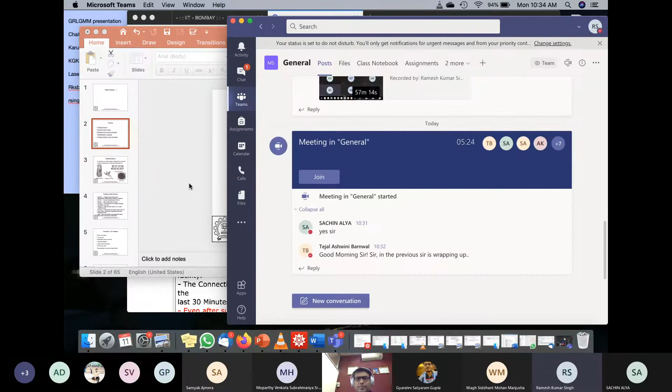So today what we will do is we'll cover about basics of casting. Hopefully I'm clearly audible, right?

Yes sir, good. And the students, are they still in the other class, or coming back? The number of students is around 15 right now. That's fine, I think we'll start now.

So basically, this class, what we'll do is cover casting basics. Then we'll talk about patterns and molds, and then there is some analysis. We'll talk about melting and pouring analysis, and then solidification, because casting inherently is a process where you pour molten material and let it solidify. And then there will be some defects and remedies which we'll talk about. So that's the outline for this entire casting topic.

So if you remember, we showed you some casting examples in the first slide, in the first class, where things were being cast. One was the wheel, which was cast, and the engine - if you remember, the cylinder was cast, the engine cylinder was cast. So the biggest casting in automobile is still the cylinder block, and of course the wheels were cast.

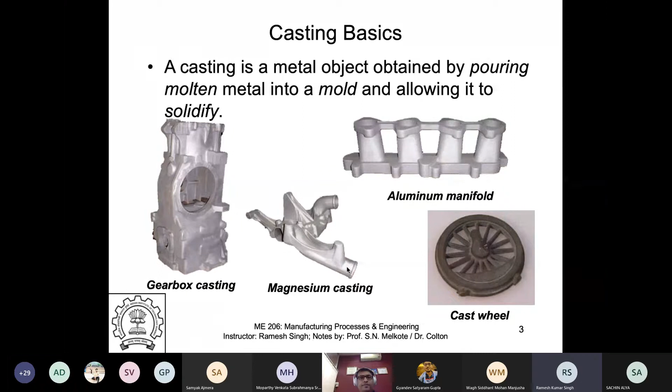Okay, so before we go into main details, we will show you one animation explaining the basics of casting. Let me just give me a minute, I'll start it.

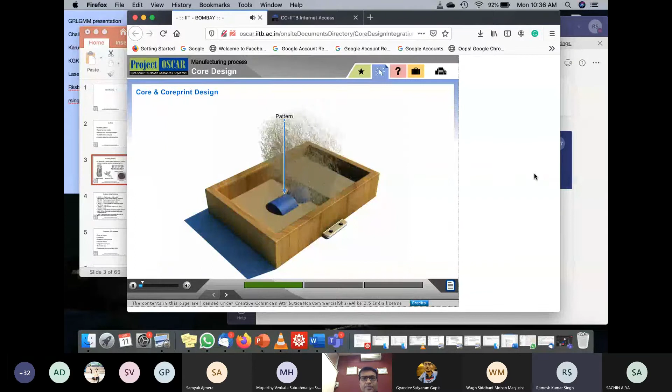Is it audible? This demonstration provides useful understanding of the following steps. Take hollow boxes, rectangular in shape, called cope and drag. Place the wooden pattern as shown in the animation. Fill with sand in layers and ram for equal distribution of sand and compactness.

This is a pattern, and there is cope and drag - two boxes, and the pattern is split into two. So this is the other half of the pattern, because you have to take the pattern out. That's why you split it into two parts, so that you can take it out.

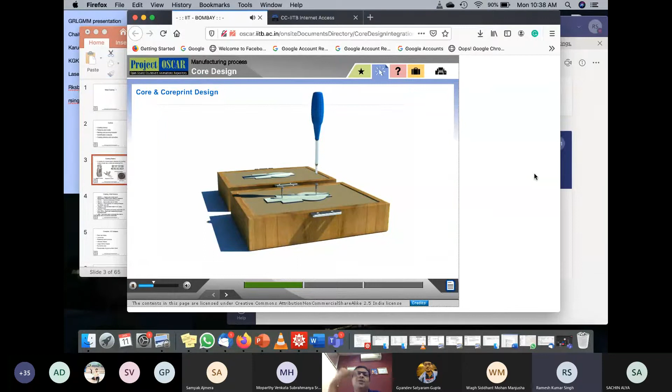Invert the boxes and remove the pattern, so you can take the pattern out now. You will have two symmetric hollow things. You put it back and then pour the metal to get the full shape. So you are splitting it because you have to take it out and create a cavity of the solid part which you want.

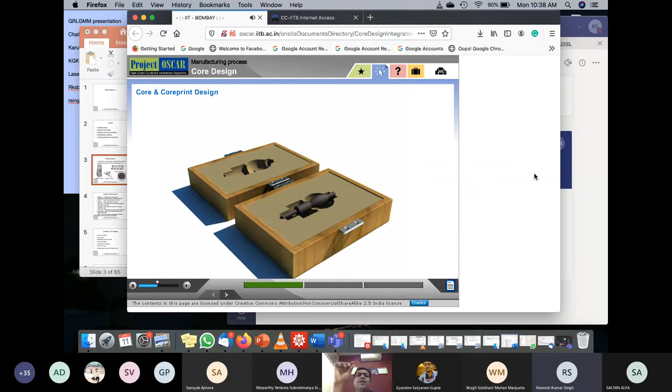So you got it out, so you got a hollow cavity on both sides. And if you want it, it is supported by core print - the core basically is this portion you want hollow. So you have a solid thing, and you can create the hollow shape by using a core. Pour the metal and the fluid fills as shown in the animation. So basically, wherever the core is, you will get hollow geometry shapes.

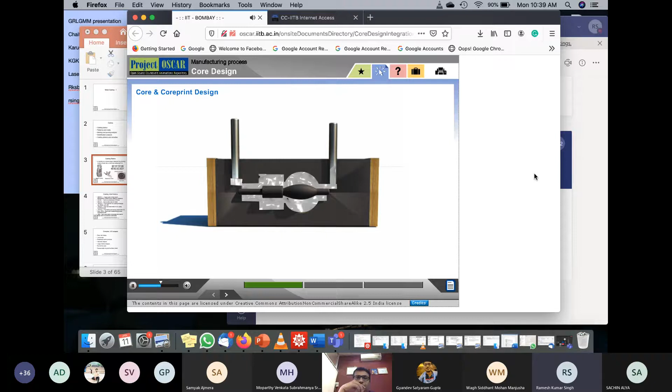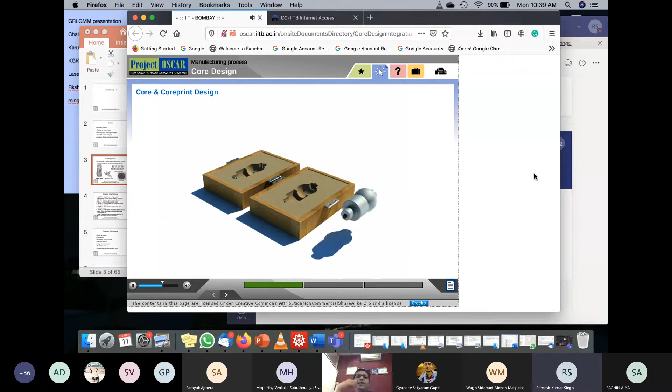Now you have a product with a hollow shape of the core inside. You can break the core and get a product - this core can be broken, inside is a hollow shape. So this core can be broken and you can get this hollow part. A sand casting pattern is similar in shape to the cast product.

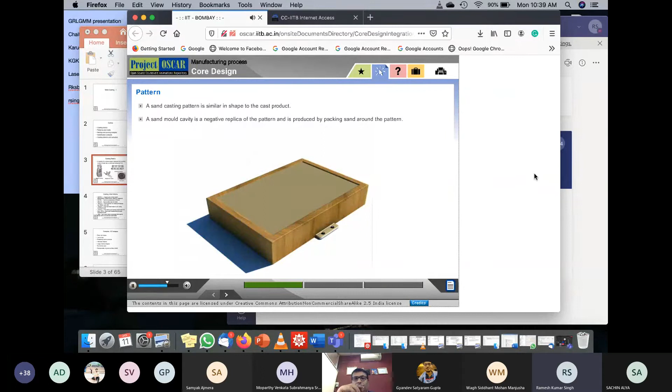A sand mold cavity is a negative replica of the pattern and is produced by packing sand around the pattern. Core: a core consists of two portions, the body of the core and one or more extensions called prints. The prints are necessary to support the core in the mold. They also conduct the heat and gases produced by a sand core to the mold.

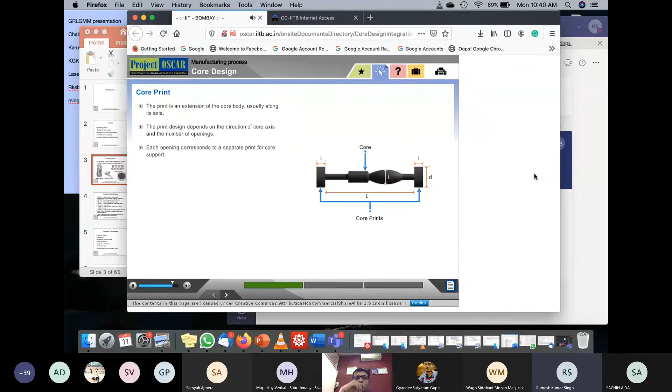Core print: the print is an extension of the core body, usually along its axis. The print design depends on the direction of the core axis and the number of openings. Each opening corresponds to a separate print for core support.

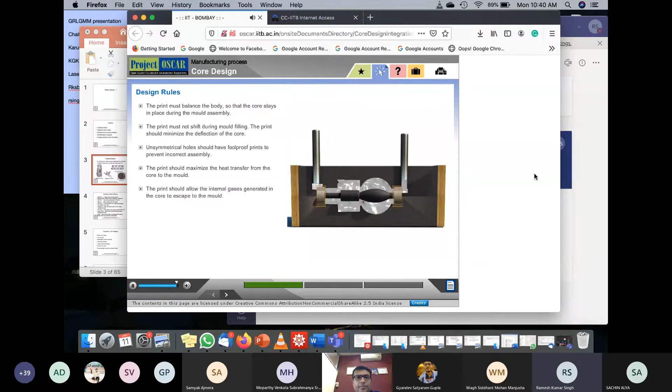So print is just going to support it, right? The print must balance the body so that the core stays in place during mold assembly. The print must not shift during mold filling. The print should minimize the deflection of the core. Unsymmetrical holes should have foolproof prints to prevent incorrect assembly. The print should maximize the heat transfer from the core to the mold. The print should allow internal gases generated in the core to escape to the mold. The prints of adjacent cores may be combined into one.

Okay, so I'll just stop here.

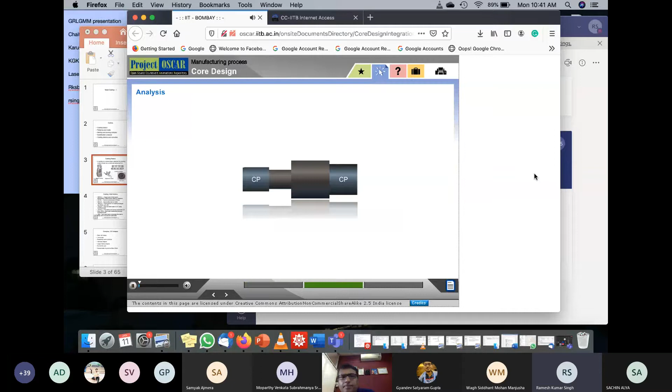So now you have a fair bit of idea about this. Are there any questions? Let me check the comment box.

How was the core removed finally? A core, you can break it. Since you have access to the core because the print will be there from the top, you can go ahead and use a chisel or hammer to break it. So the core can be broken. You can take some sort of chisel and break the core out of it. The core always has access because it's a hollow thing, right.

The problem would be if it's a closed hollow thing, then it may be difficult. In that case, you'll have to do something else. But typically what happens is you need to have access to the core. Otherwise, if it's hollow inside, there may be difficulty breaking the core. But you typically have access to the cores.

So cores can be broken. But if in some cases you have a totally closed kind of thing, you'll have to make the casting such that... there are other methods in that case. I'll show other ways to do it.

You can have the mold itself designed such that the hollow portion will not remain in the mold. So you'll have to figure something out with that. There are other ways, and I'll show you some other methods to do that.

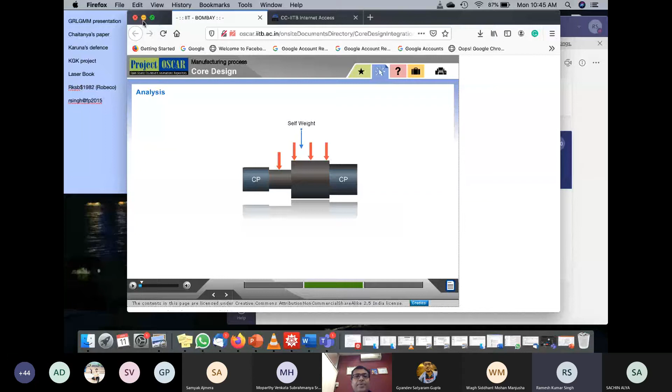But typically you want sand where you can have enough strength, so you need sand, you need binder, and you need good quality sand to do casting. I'll talk about what kind of sand you need. So let me just go ahead.

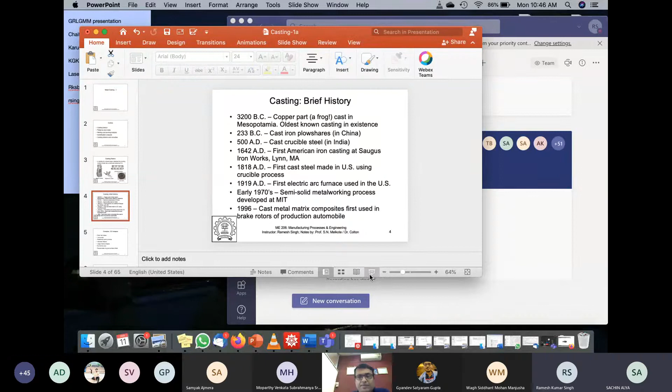Plowshare is basically a hull, the thing known for tilling the land. Chinese made a cast iron plowshare way back in 233 BC, and Indians could make it around the time of Aristotle. Greeks imported swords from India because Indians could actually make wrought iron. They knew how to forge and cast.

Cast crucible steel in India was done in 500 AD. In the US, the first cast steel by crucible was done in 1818, so India did it 1300 years before. We have the Mehrauli pillar, made of steel which has not corroded in 1500 years, probably from the Gupta period. There's no corrosion in the iron they created, still a wonder for metallurgists.

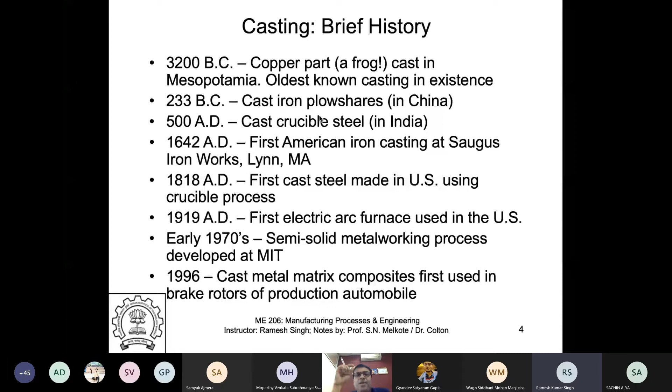The first iron casting was at Lynn, right next to Boston, in 1642 AD. Initially electric furnaces were not there; these were all coal-fired furnaces before. In 1919 the first arc furnace came into the US, and in the 70s they developed semi-solid metal working process, which is basically a combination of casting and forming. Then in 1996, metal matrix composites were cast, basically casting metals with ceramic particles in them.

The advantages of casting are that you can create near net shapes, do low scrap casting, and it's a relatively quick process. Casting can be done very fast. It can be used to create intricate shapes, and you can also create large hollow shapes. There's no limit to size, so casting is as big as you want.

You can create castings and get reasonably good surface finish. For dimensions, at least sand casting you can do as large as you like, and you can do small, like 1 millimeter or so. All the gold ornaments are cast, so you can imagine the length scales in casting, any size you can imagine can be cast. Most of the big products, the huge machines, their structures are all cast.

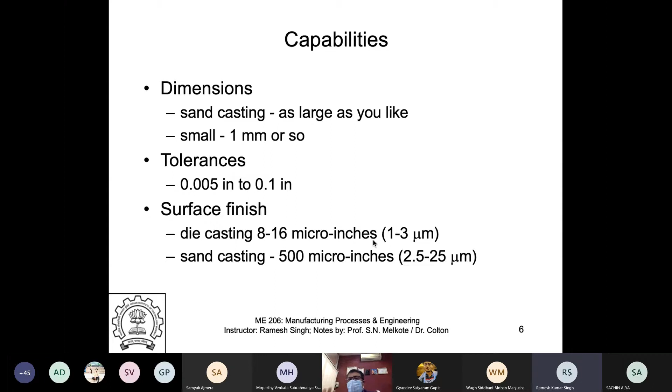The tolerances can be from 0.005 inches to 0.1 inches, and the surface finish depends in die casting. Die casting is when you have a permanent mold, so you can take a steel mold and inject aluminum or brass into it. Most plumbing products, your faucets and taps, are all die cast, especially if it's brass or aluminum. Steel die casting needs something of very high melting temperature, so it's still a bit difficult, but aluminum and brass you can do very good quality die casting.

These are some of the processes: sand casting, shell casting, plaster casting. Let me show you videos of these processes. One student mentioned he doesn't understand sand casting, so I asked him to unmute and tell me what exactly he doesn't understand, so I could explain it properly.

The student said he doesn't know the terms, asking what sand casting is. I mentioned I showed a video earlier with two boxes, but let me explain step by step what sand casting is, since if one person didn't understand, maybe others didn't either. Just give me a minute and we'll go back to it.

Sand casting: if you want to create a product, first you need a pattern. How many people don't know what a pattern means? Whatever shape you want to create, you need to cut it into half. Imagine I have to cast a ball. I will take two hemispheres, because I have to take this ball out. If I have to make a solid ball, what kind of cavity do I need? Tell me.

What kind of cavity do I need? A spherical cavity, right? Full spherical cavity, right? Yes or no? Yes, sir. So now I will take two hemispheres.

Imagine this is a hemisphere, and then I will take a box, and I'll basically put sand on this box. Then I'll ram the sand with the ball. So imagine this is not a this thing, but a half ball.

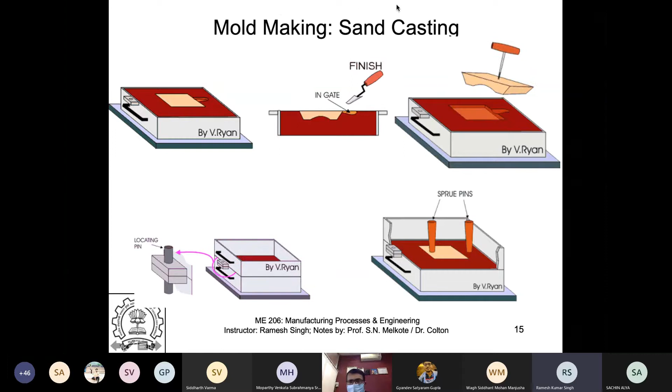And then what I will do, so this one is very simple geometry, right? This geometry is only, I'm making a, what is it called? Just a rectangular kind of a thing. So I can just take the mold out like this and then put more sand into it and cast this kind of a part. And then out comes this kind of a part.

But if you imagine I have a more complex part, say I have a ball. So what I will do is I will put in this box, let me just show you something like this with the pointer option. I'll use half ball here, half ball here, and extract it. Let me go back to that video again.

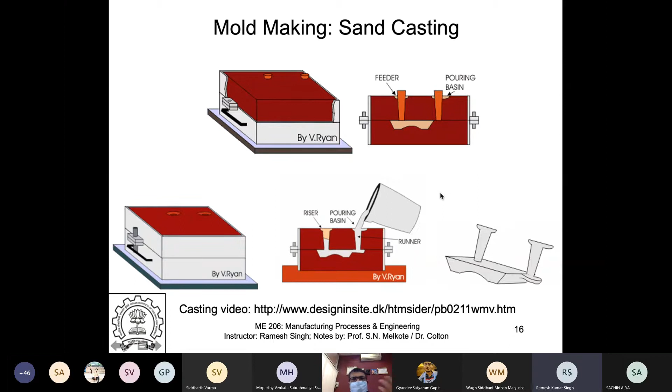So sand casting is only sand because you're using sand there. Let me just go back and then show you this thing, how to extract the, if you don't remember that.

To make a hollow metal casting, we require a pattern supported by a core and a core print. This demonstration provides a useful way of understanding the following steps. Take a hollow box, rectangular in shape. One is called cope, one is called drag.

The two boxes, as shown, so this is the half pattern. So you'll put a ball there, half the ball there, and pack the sand for compactness. And this sand will not be natural sand. This will be with the binder, so that when you pack it, this sand will become almost like a solid, right? And then you basically put the other one.

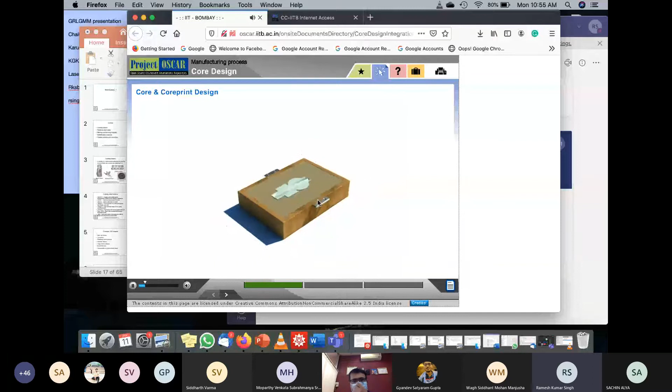Put the other box on top of it. The bottom one is drag, the top one is cope. And then you put the other half pattern on top of it. And then put the sand, ram it.

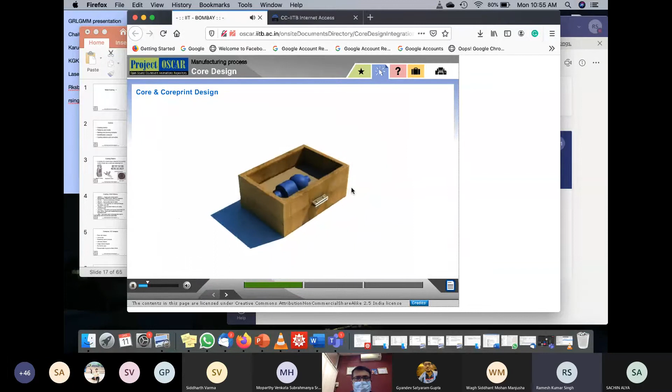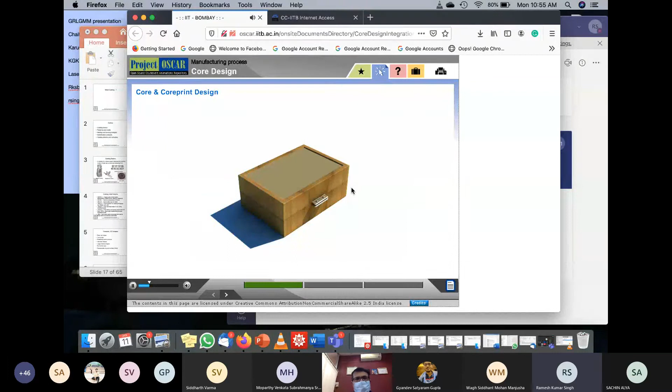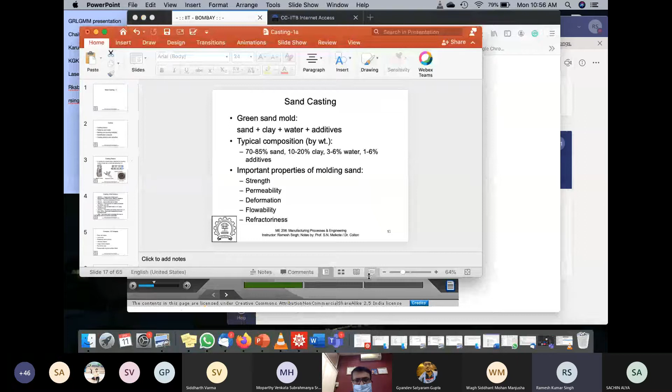And this cavity is surrounded by sand. That's what sand casting is, because you are creating this cavity in two boxes full of sand. And those boxes are termed cope and drag. I'll stop this here now and go back to this. So now you get what sand casting is, right? Anybody who has not gotten sand casting? Okay, good. Very good question.

How is the pattern made? So pattern can be made by machining, by somebody who is very skilled can carve it out of wood. Right now it is done by 3D printing. You can take a solid model, do a rapid prototyping, 3D printing of it. You can also do machining of it.

Or if somebody is very creative, because back in the day, somebody had to make the pattern, right? So somebody would make the pattern in wood. That's what they would do. You get me?

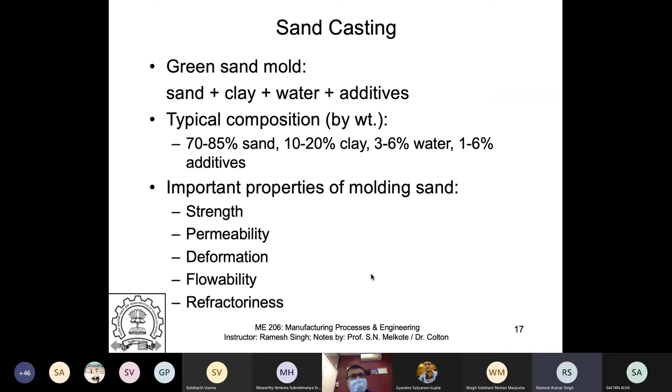Yes, sir. So there are multiple ways to make the pattern. A, you can do 3D printing. B, you can do machining. C, you can do woodworking. D, somebody can give the shape by shaping the wood, right? Like if he is very talented, because back in the day, the entire shape pattern was created by hand. People, the shilpis, had the skill to do it. Today, probably not, right? So that is what sand casting is.

So sand casting requires, let me just go ahead to sand casting. I've shown you, right? Now you know, everybody knows what sand casting is. So there are multiple ways to do casting. Sand is just one of them. You can do shell casting. So let me just wait and show you some videos of shell casting.

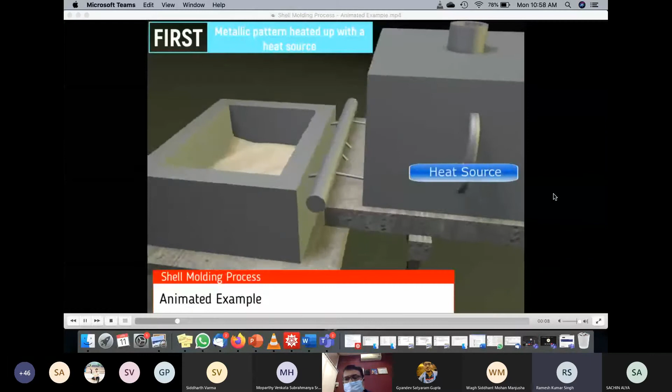Shell casting is also a very interesting process. I'll show the shell molding process. So they take a metallic pattern.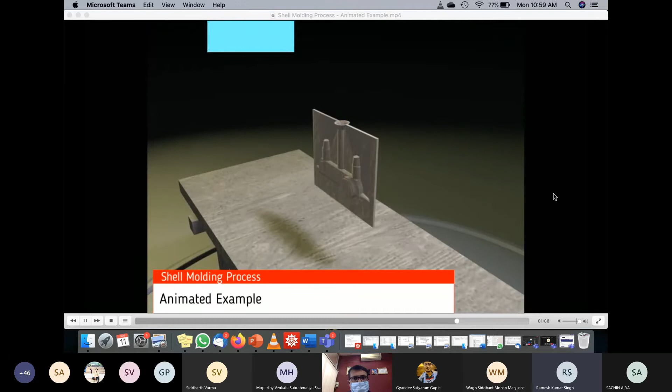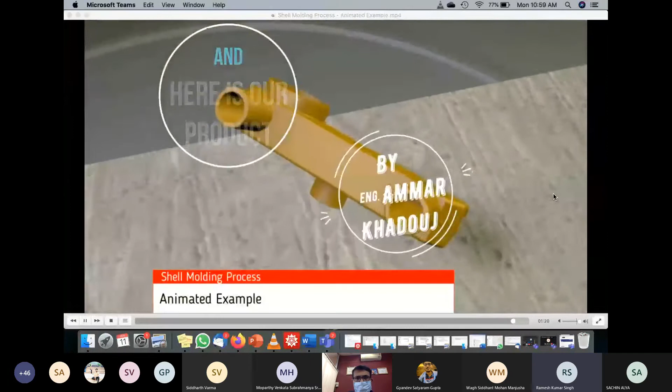Okay, shell casting. Can somebody tell me what is the difference between sand and shell casting? You saw the video, right? Anybody?

So we have to create the half part separately, not at the same time. No, but you do that same thing in sand casting also, you have two half patterns. Sir, no need of core for any hole? Core is there, core is there. Everything is there, you make a shell out of that.

So you mix the sand with the resin, and the resin cures. So instead of having the copes and drags, you get a shell, a complete shell of the sand with resin mix. You get me? Yes. So you get a shell, like a solid sand and resin.

Resin, you know what resin is? Some people don't know what resin is. Yes, the final product is hollow in shell casting? No, the shell casting is just a shell. Instead of having two boxes and a cavity, the cavity is in a shell. That's the basic difference. So in shell casting, they will have sand mixed with

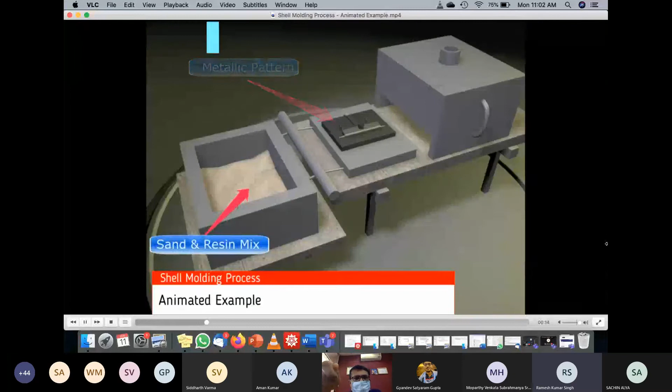So let me go ahead and show you the shell again. Basically all it does is, see, it takes a metal shape, whatever you want to create, a metallic pattern. You heat the metallic pattern and you have a sand and resin mix, so it will go ahead and stick to it. And it will stick to it.

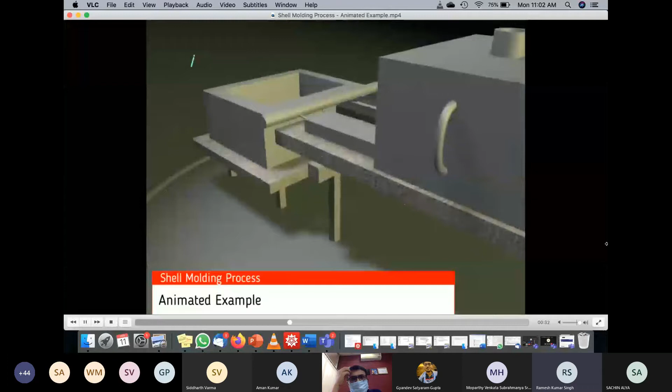And then you get a second half of it. Because you're doing the second half if you need a core. Right? The second half came. Now you have two pieces of shell. You combine the two pieces, tighten them together, and pour the metal there.

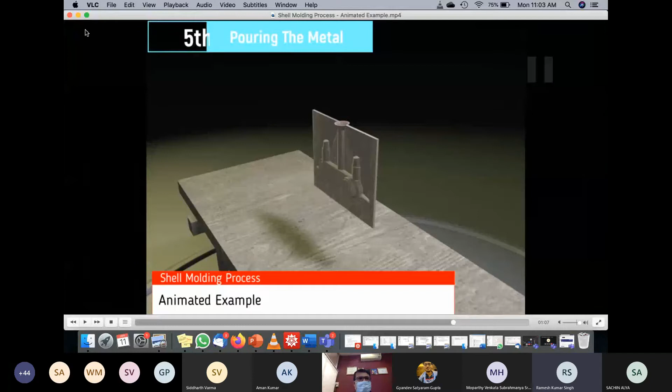Exactly the same, and you can put the core if required. And then pour the metal. You get me? It's exactly the same process as sand casting. The only difference is that instead of having two boxes, you have a hardened shell around it. And you need two pieces again because you have to take the pattern out and put in a core if required.

So it always needs to be in two, like cope and drag, right? It needs two sections so that you can withdraw the pattern out. Okay, any questions about the shell one?

It can be hollow in shell casting if you have what? If you have a core there. So you have to leave the core there to create the hollow pattern. Otherwise you will get a solid thing.

The product is not shell, the casting mold is a shell. It's not a solid box, but just a shell of whatever you have, or whatever shape you want. So that's why it's called shell. Similar process, just you use a resin to create a stiff shell, a thin thing which will create a cavity of whatever part you want. Does it make sense? You got shell, right?

Then there is plaster casting. This plaster casting, what you do is you use this for low melting temperatures, for creating brass statues or aluminum things. If you've noticed those people who sell small statues, metal statues, the Banjaras, they actually do this plaster casting. I'll just show you the process.

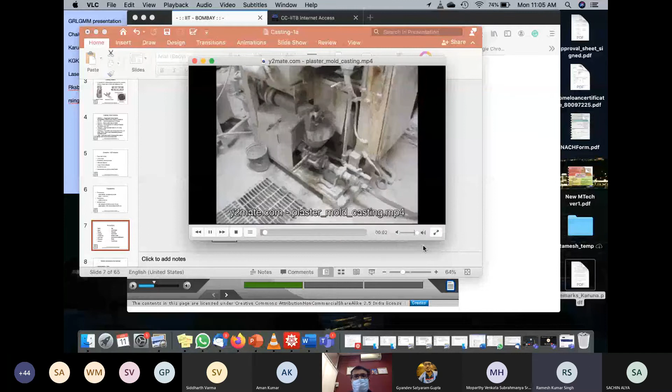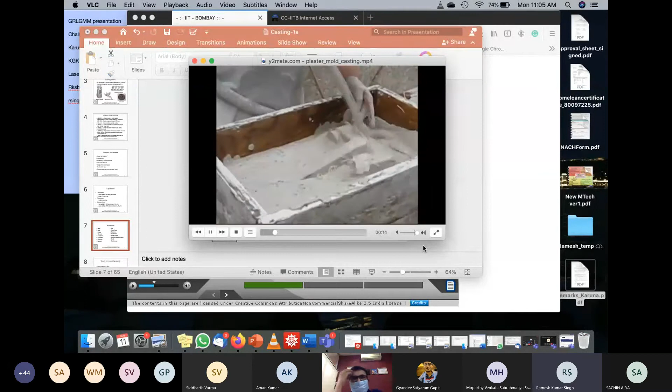Yes. So plaster casting actually takes, see, if you want your hand casting, you can do your hand casting also. A lot of artists do it. You'll put a plaster around your hand and then take it out, at least you have to do two pieces to basically take it out actually.

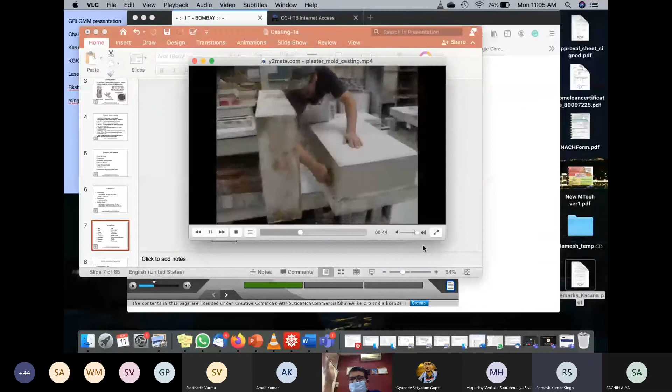So instead of having a sandbox, your mold is made of plaster. That is the basic difference. But then the flip side is you cannot use very high temperature material to mold here. You will use only lower temperature material, something like bronze, very low melting temperature material you can use. So it's exactly the same kind of thing. They will show you what kind of feature they want to cast. They will open the box right now, and then you'll be able to see it.

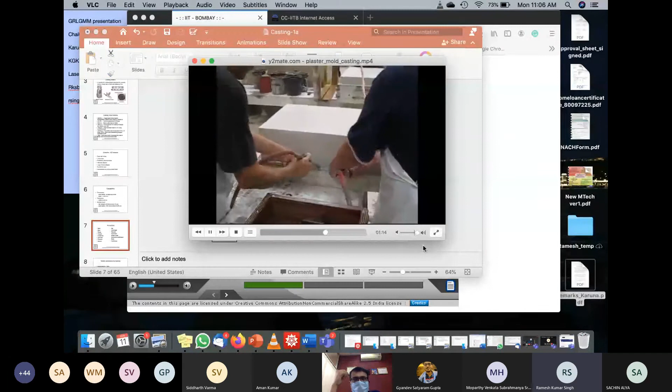So there is a question, is this plaster of Paris? Yes, this is plaster of Paris. It just solidifies. The only flip side is you cannot use it for high temperature material. You cannot use it for steels or iron.

See, they will show you. They'll open it and then show you what kind of feature they want to do. So this is the shape they want to create. They will get another half of it and then pour the material. So this is the shape they want to create, and this is the cavity which will fill with metal. Okay, the cold... so this is plaster molding. Instead of creating the mold out of sand, you create the mold out of plaster.

And then let me just show you this. The quality will not be very good, but you have to bear with me.

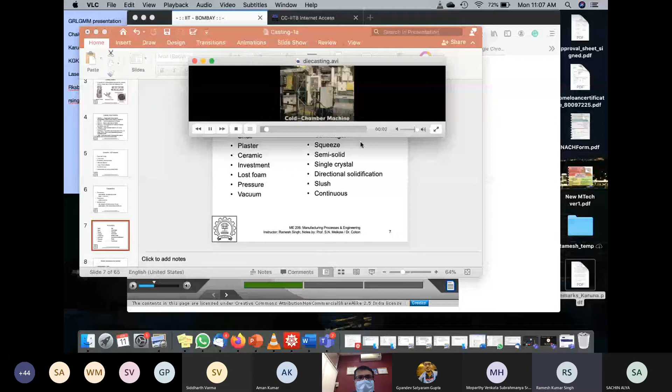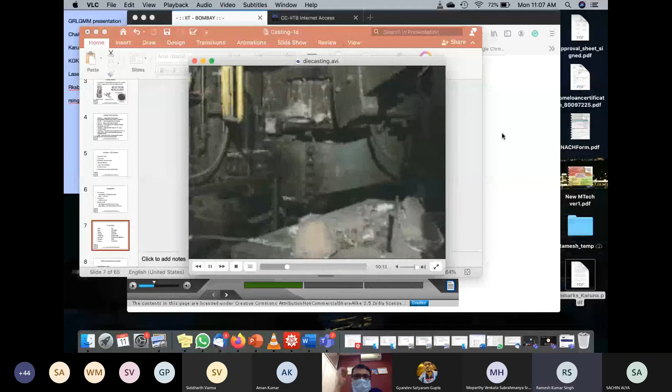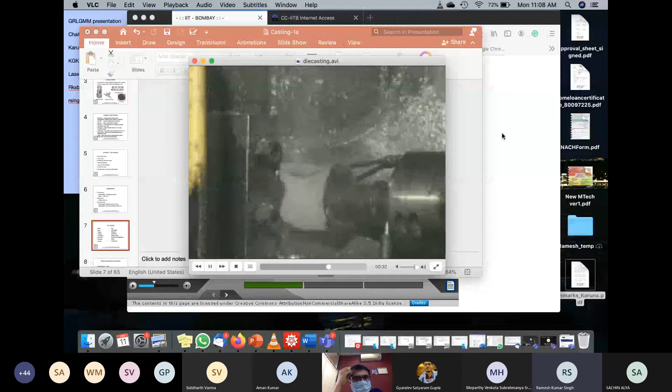Cold chamber machine is used primarily to die cast aluminum, magnesium, and copper alloys. In the cold chamber machine, the charge is supplied by ladle or feed system from an external furnace source to a holding pot at the shot end of the machine. The feed system components are not submerged in the molten metal. The charge is poured ahead of the plunger tip through a pour hole in the shot sleeve. As the plunger advances, it closes the pour hole and drives the molten metal into the die. After the metal in the die solidifies and the die halves separate, the plunger thrusts forward, extending the plunger tip past the cover die. This pushes the biscuit that solidifies at the end of the shot sleeve, assisting casting release.

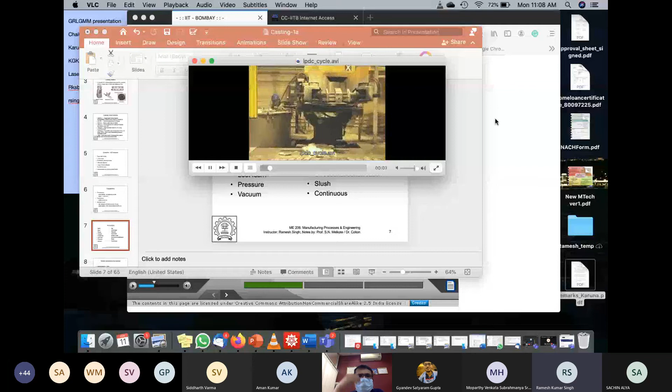So die casting is, the difference would be that you have a solid mold, maybe a steel mold, and you can do aluminum casting. So there is a permanent mold, and the material is pushed through a plunger to fill the cavity, and then you need to take the material out. It will split open once it solidifies, and then you can take the part out. So a lot of these faucets, all these plumbing equipment, a lot of these taps, faucets, they're all made using this technology, right? Any questions? Is it clear what die casting is?

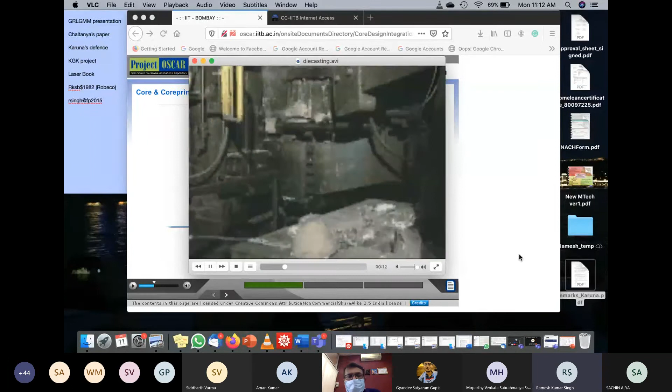The cold chamber machine is used primarily to die cast aluminum, magnesium, and copper alloys. In the cold chamber machine, the charge is supplied by ladle or feed system from an external furnace source to a holding pot at the shot end of the machine.

There is a plunger. The feed system components are not submerged in the molten metal. The charge is poured ahead of the plunger tip through a pour hole in the shot sleeve.

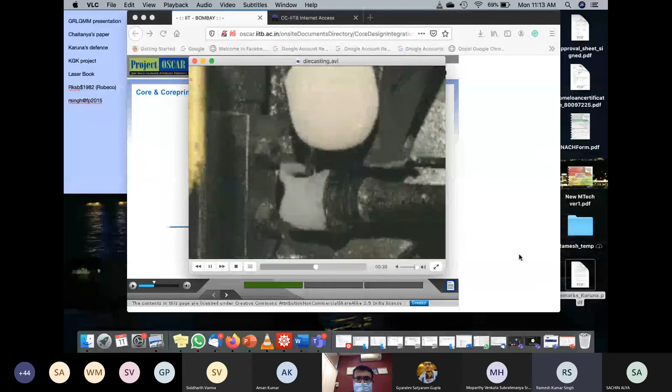As the plunger advances, it closes the pour hole and pushes the molten metal, driving it under pressure into the die so that it fills the cavity.

This is the shape you have to create. The die halves are separating, so you have to fill the material there.

The plunger tip extends forward, past the cover die. This pushes what becomes your biscuit part, which solidifies at the end of the shot, assisting casting release.

So now you understand what this die does. How was it pushed away, the metal separated? What do you mean? Just now the plunger tip goes ahead and pushes it.

Once it solidifies, the plunger pushes it initially to get the liquid inside. Once it solidifies, it pushes further so that the material gets out of the mold, because material has to get out of the mold, right?

So from one mold it will push further so that it gets out, and from the other mold we can pull it, or there will be push pins from the other side which will push the mold out, because it has to be taken out.

So this plunger does two things. First, it pushes the material to fill the mold. Second, once it solidifies, it pushes it out of the mold, because the mold is a two-piece thing.

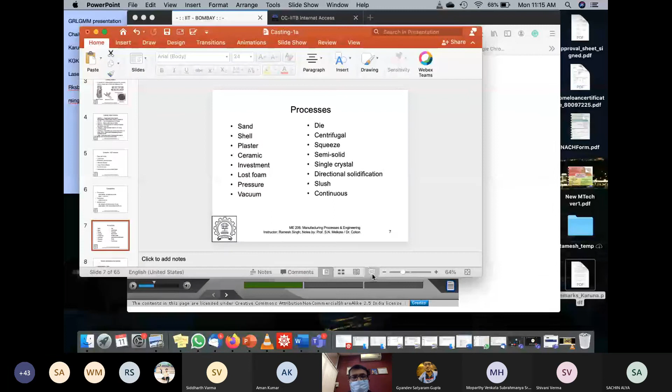Let me now go to this. Then there is investment casting.

All the jewelry, how many people know how gold jewelry is made? Anybody knows how gold jewelry is made? All of us gift gold jewelries on occasions, on weddings and whatnot. Anybody knows how gold jewelry is made? How do you make this gold jewelry? Anybody? Can you tell me how gold jewelry is made? Somebody should know, right?

Nobody knows? So if you don't, it's made by something called investment casting. I'll actually show you how investment casting works, so that next time somebody asks you how gold jewelry is made, you can talk about it.

Did you guys notice how investment casting works? How many people understood how investment casting works? Anybody? Sir, can you please rerun the video? I get a little bit. Let me rerun it. Okay, watch it carefully.

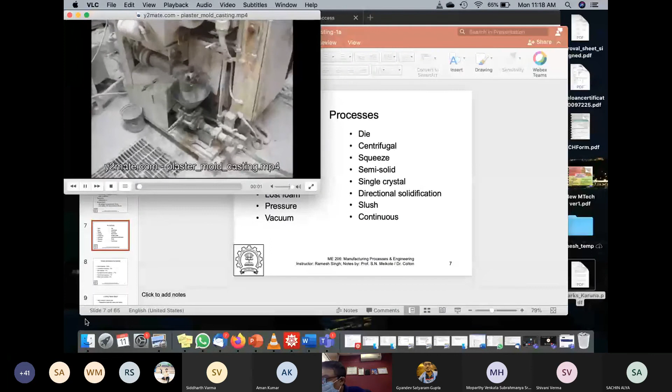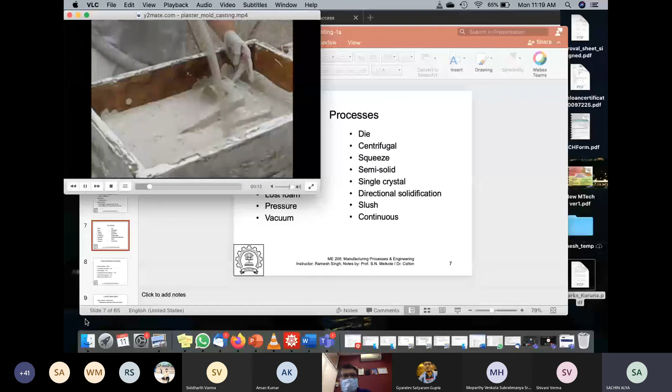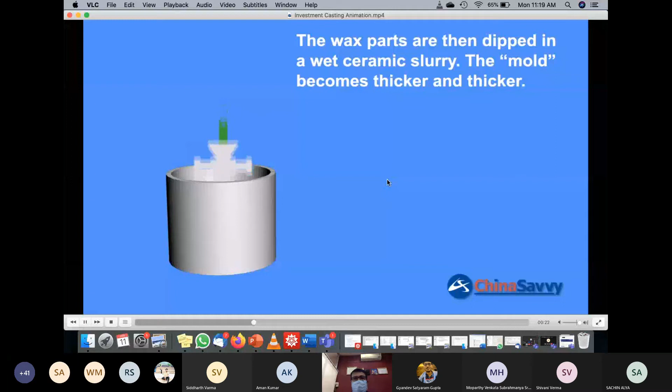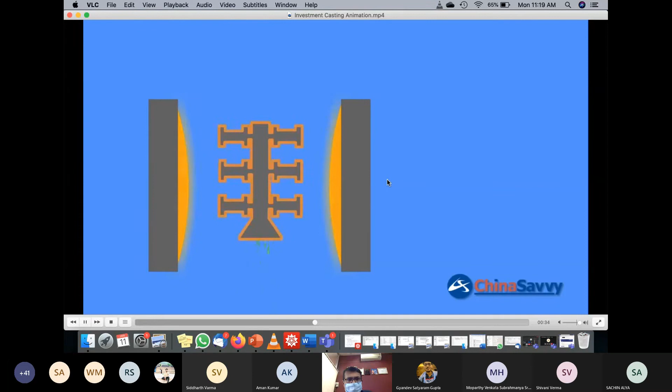Sir, the video is the different one. Okay. Plaster. Okay.

Did you get what it does? Yes, yes, now it's clear, sir. What is it? Can you explain it to the other people? So first a pattern was made with the help of wax, and then we create a hollow thing. Why wax? Sir, the wax is simply used for creating a pattern so that we can get the hollow substance after making it. Why not wood? Sir, while heating it melts down and goes. Yes, sir. So you want a low temperature thing. You need a wax just to coat.

What is it called? Ceramic slurry, yes, around it, right? As you did it in the plaster, it's very similar to the shell one. So you take wax mold, put it into a slurry. This slurry wraps around the wax mold, and then you bake it. When you bake it, it will evaporate the wax and sinter the ceramic mold. Then you can pour your material on top of it. Okay, so that's what this thing is.

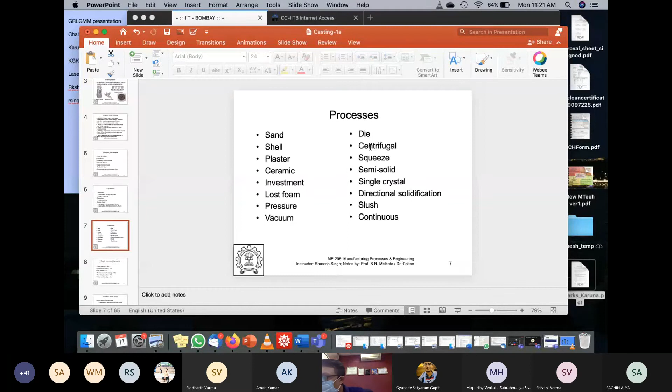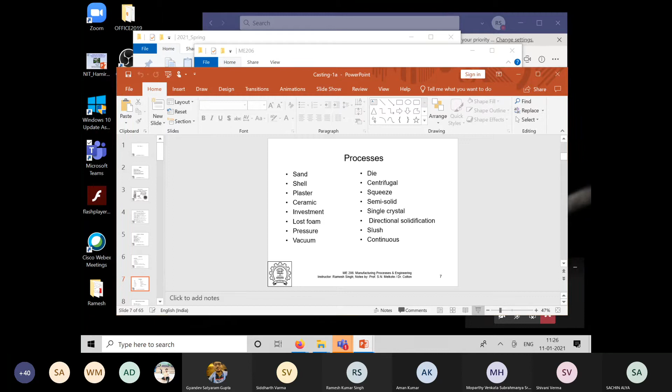Let me just quickly... I am sorry. Sir, your voice was not coming. Sir, you are on mute. Hello.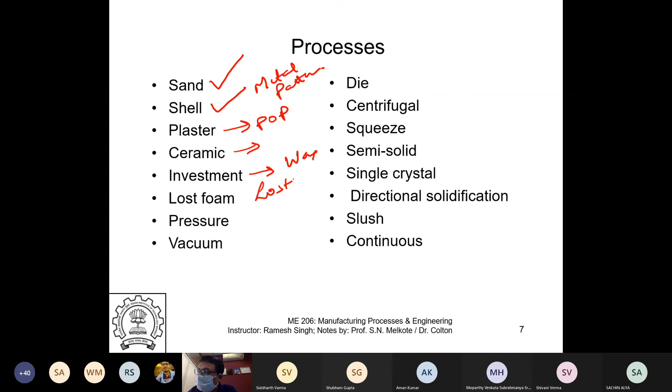Sorry, I think I lost you there for a minute, right? Yeah, so there is sand mold. You understand now, right? Shell mold, where we are using resin plus sand. Plaster, you know we are using POP here. Ceramic is similar to that. Investment, well, there will be a ceramic mold. Investment actually uses some sort of a ceramic mold in the same fashion as you do it here in the shell. All you do is this. Here you use a metal pattern, heated metal pattern. Here you use wax. It's also called lost wax. Lost foam is also very similar, like lost wax only.

Pressure and vacuum are die casting processes. In die casting, you have a permanent mold. And since there are thin pieces, you need pressure there to push the fluid in. Squeeze casting again is where you squeeze the material in.

Semi-solid is a combination of casting plus forming. Then there is something called single crystal, which is used for turbine blades. There, what you do is while casting, you constrict it, you allow only one grain to pass, and you put a chiller plate here to cool it. Only one grain comes out, so the entire material is just one single crystal. This is a technology which is very critical.

Can anyone tell me, if I have a single crystal and if I have multiple crystals, what will be the difference in properties? The creep property will be better than single crystal? Let me bust the bubble - the property is actually inferior to a multi-crystalline, at least the yielding property. I'm talking about the creep properties - only thermal creep is better in single crystal.

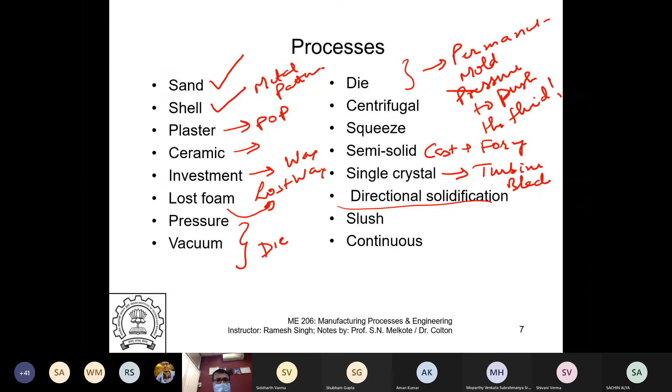Single crystal is something special, and then there is something called continuous casting, which I'll show you - all the steel plants have this continuous casting where you can create features right away. Let me go ahead and share this again so you can see the continuous casting video.

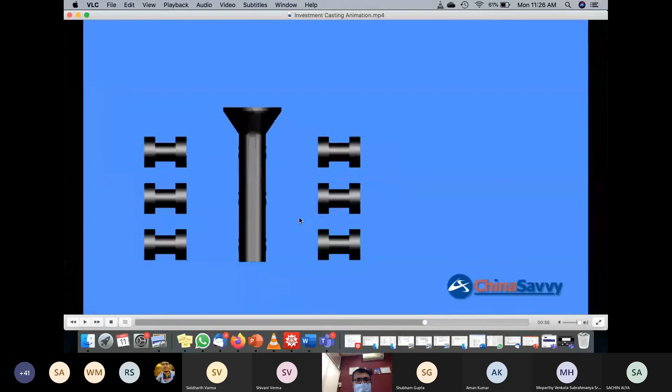Can you see my screen? Yes sir, which one - the process one, or the video? The VLC one. Good, that's what I wanted to show you. Videos.

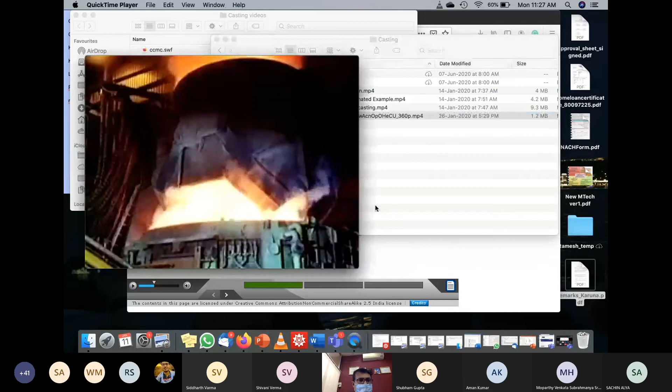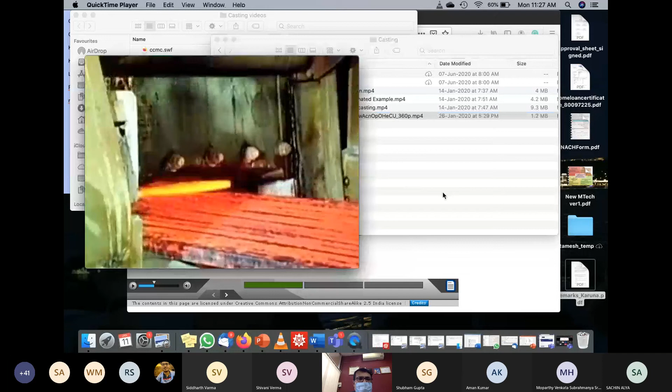Steelmaking primarily involves the removal of impurities from iron and scrap metal and the addition of desired materials. This process occurs in a furnace at extremely high temperatures. Steel leaves the furnace in liquid form and is then shaped into flat slabs and other useful shapes. Steelmakers may form slabs into long sheets by passing them between heavy rollers.

Continuous casting basically means that when they pour the material, it freezes and then is rolled. So you pour the material, it freezes, and you can roll it right away. You don't have to cast billets out of it, you don't make billets. So you can do it continuously, keep on casting. As you pour it, it solidifies, and then you roll it in the hot condition, and keep on going. That's called continuous casting. You don't have to create discrete billets out of it. That's what continuous casting is.

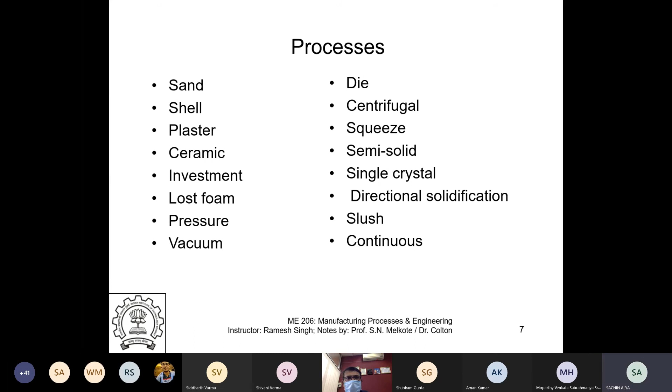Okay, so now you're clear with all the processes, right? How many minutes do I have? Do I have some time, or no? So four minutes. Okay, let me just do a couple of slides.

Sand casting is 60% of the processes. Investment casting is 7%, primarily critical for tolerance, and the surface finish is very good in investment casting. Die casting is another 9%, mainly for faucets, taps, and plumbing supplies. Permanent mold casting is similar to die casting.

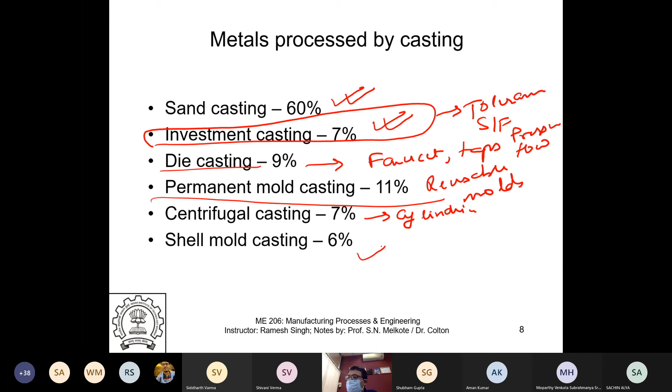And then there is shell mold casting, which I have explained, at 6%. So still, the major chunk is sand casting.

Let me just give you a thought question and we'll quit here. What is the size of the pattern? Do I need the pattern exactly the same size as my object, or will it be different? Just a thought question, and then we will quit here. This is the last question. Can somebody tell me? Should the sizes be the same? Pattern should be made exactly the same size as the object we want, or no?

A little bigger, maybe. Why a little bigger? It's a very good answer, you've answered it correctly. But why do you want to make the pattern a bit bigger?